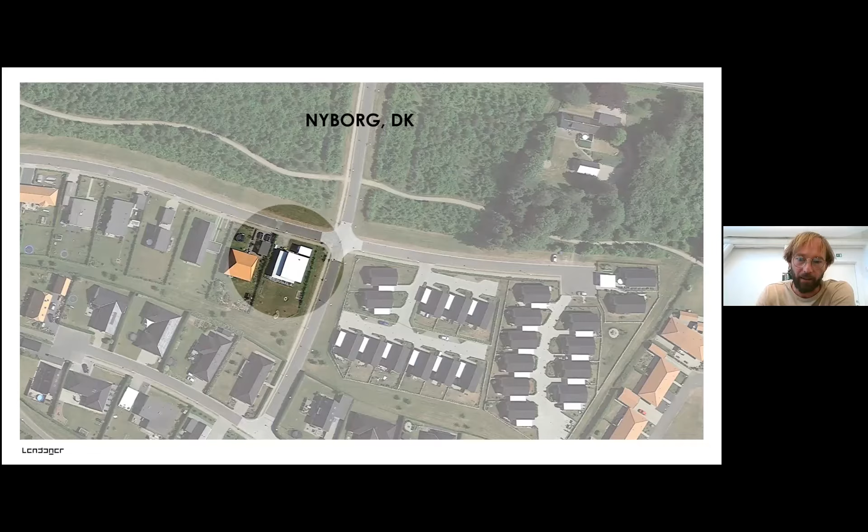The first project that I did was Upcycle House. It's a very small project, done in a very boring context in Nyborg, one of the most boring small cities in Denmark—I can say this now that I'm not in Denmark. But the interesting part was, could you build a very sustainable single-family house using only upcycled materials? At this point in 2011, the question was, what is upcycling in general?

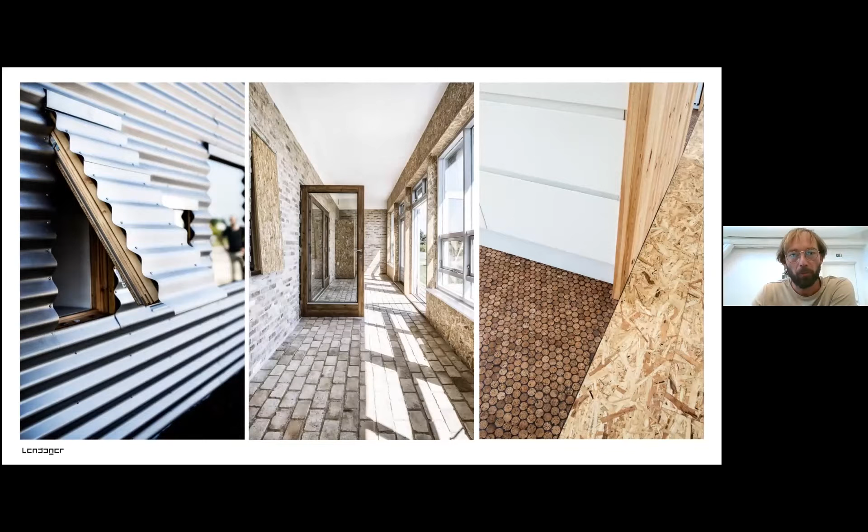Could you take materials like beer cans, soda cans, newspapers, textile, and upcycle them, find products where you could build a single-family house, and what would that mean? One question that started it all is something you've seen in many projects, which is the container. But what does that represent?

It represents an object from a different industry that becomes obsolescent, a waste product that you take into the building sector, and instead of a new structure in concrete, steel, or wood, it represents space and value. But if you ask that of every single product in the building, how would that look? Where would insulation come from? What about the windows, the roof, the facades, the installations, all this?

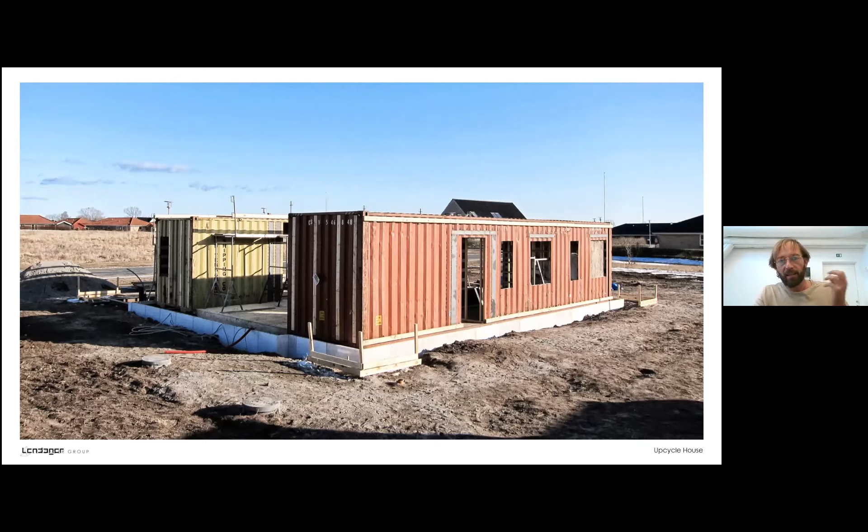That's what we did with this house that's made out of paper sheets. That's the black sheets, aluminum from beer and soda cans, and inside we use textiles, bottles from plastic that was shredded and upcycled, wood, insulation, and all these different items that created a quite unique single family house. The interesting part was that we saved 86% CO2 compared to a benchmark house, and it cost 1.7 million crowns, just around half a million euros.

So it was a very, very cheap house and a very, very sustainable house. And that led to the next question: what organism can actually scale this into a commercial building? Is that actually possible, and why isn't it possible? So I started looking at my own organization, which at that time was just an architecture company, and I could see that I needed to create some new types of businesses.

This is our management consultancy business that guides businesses to find their personal sustainability agenda. Our architecture business is designing, drawing, and making all the design documents to realize a building. But what we could see was that in the quest for sustainable buildings that evidently made a difference, we couldn't find the right materials that could be implemented commercially when we wanted to build with upcycled materials. So I created a new company called Upcycle Products that delivers these materials to our own projects and now also to other contractors and architects.

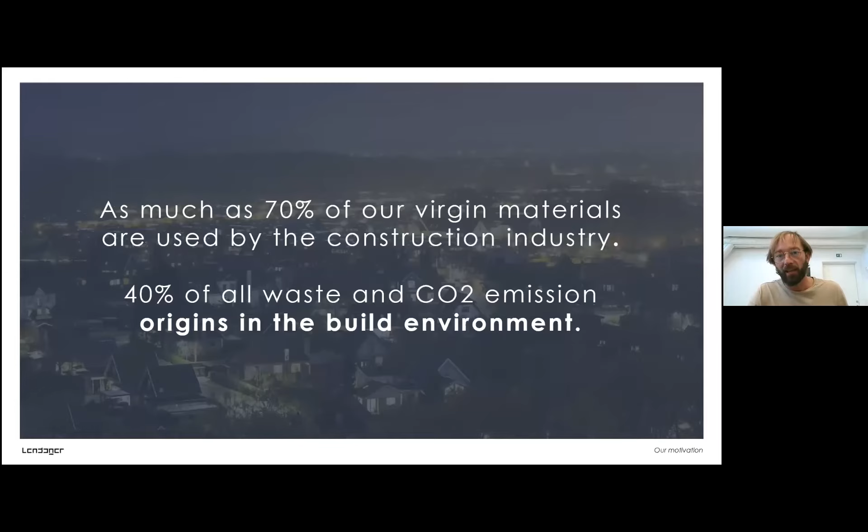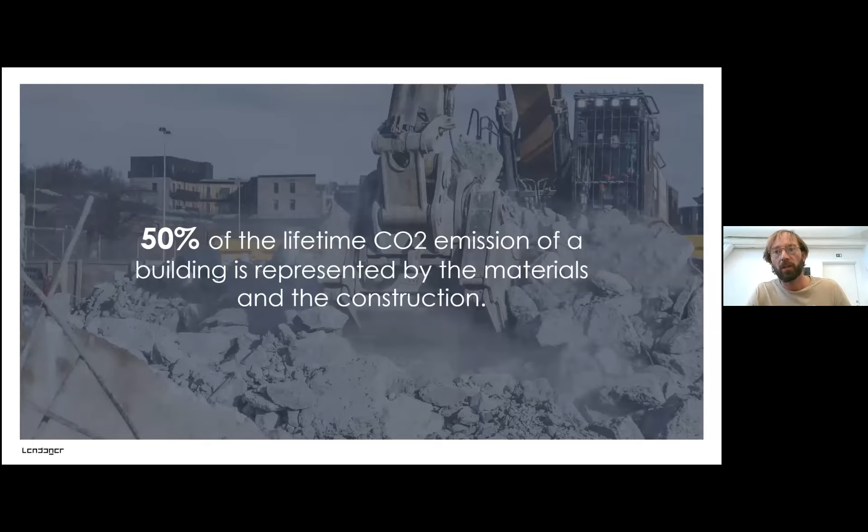So what we can see is that we also have a CO2 emission that represents materials, and 50% of the total CO2 emissions comes from the constructions. It's the surfaces, it's the matter that we're dealing with, and it's immense.

Often when talking about resources, this is just to show that it's a vast potential. In Denmark, we have 12 million tons of waste. We are one of the biggest waste producers in the world, unfortunately. But if you look into the construction sector, we are using 10 million tons of materials. Just putting these two in front of each other as a potential, we have enough waste annually to create the coming buildings. We just need to organize and urban harvest these potentials.

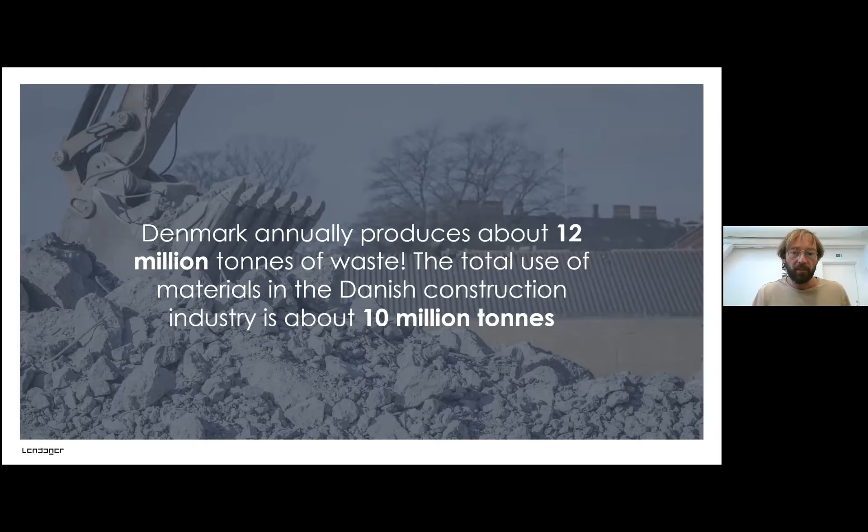An important thing when we talk about sustainability is also that it's about consumption. Where we are today, every time we create a sustainable solution, we create something that pushes an unsustainable product out of the market. So in that case, growth is our tool to scalability of sustainability, which is a very important agenda for us. That has been a very different agenda from the 'less is more' ecological approach to sustainability. We do believe that the drivers of scalability and business are what we need for this to scale up and accelerate, and that is important for now and the next coming decades.

Cascading is one of the most important things for understanding how a used resource can be added more value, going up or down. And prior, you always talk about cascading with wood - you have a big wood chunk and then you cut it up more and more. But we found out that this approach with cascading goes for all materials, glass, brick, plastic, and so on. It's your choices about how you handle these materials that can bring more value using less energy to produce an upcycled product.

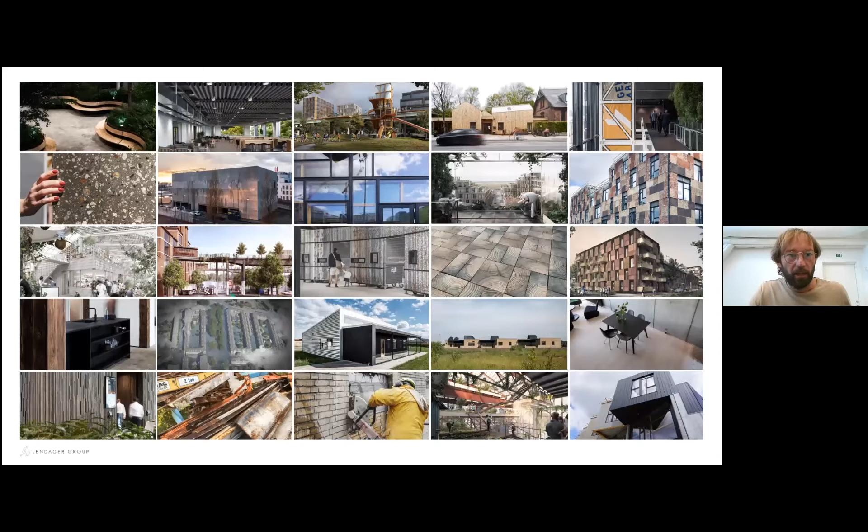So going into some of the linear projects, here's a vast image of some of the projects that we've done over time. The project I'm going to start with is Upcycle Studio. We believe it's one of the first commercial circular economy projects in the world, where we are leaning in and looking at some of the biggest waste problems in the world, upcycling them into products used on a commercial agenda, not costing more, but generating high sustainability and high value.

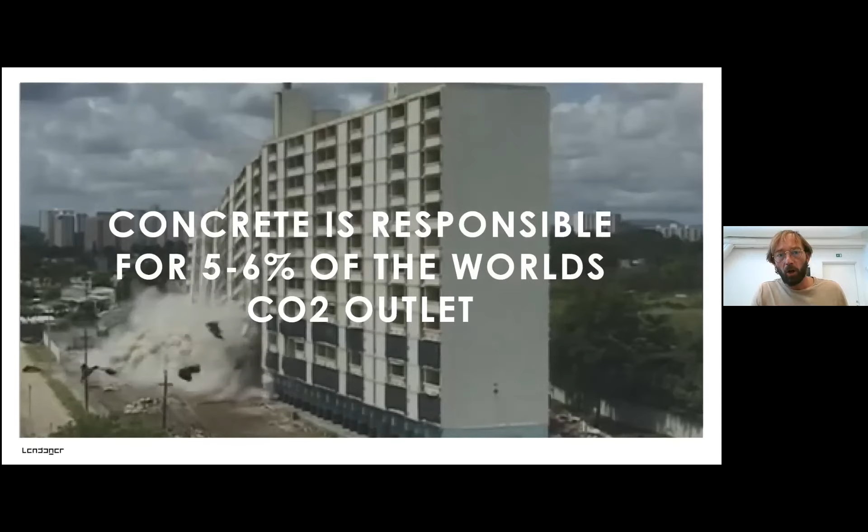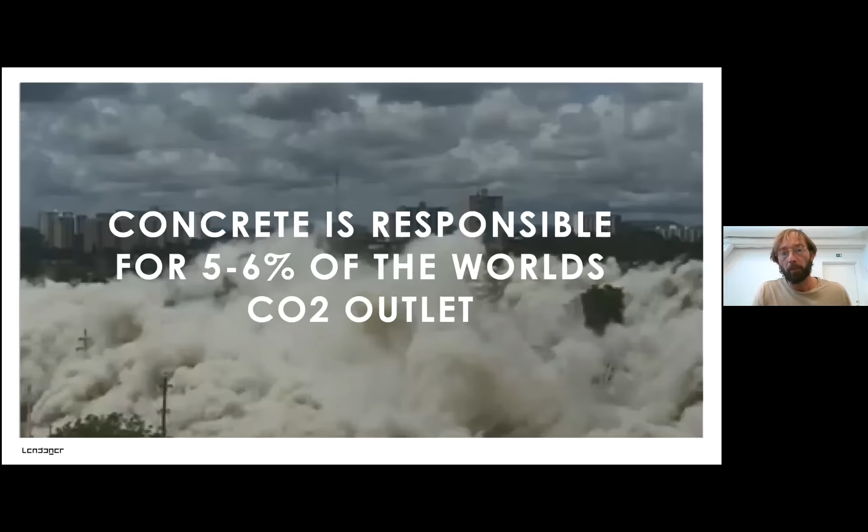Here are some of the places in Denmark where we harvested our waste resources to upcycle them. One of the main problems is concrete - this is how we often handle it. Unfortunately, we crush it and put it in the roads, which is a highly unsustainable approach, because it creates chemicals in our drinking water, which is a very big problem.

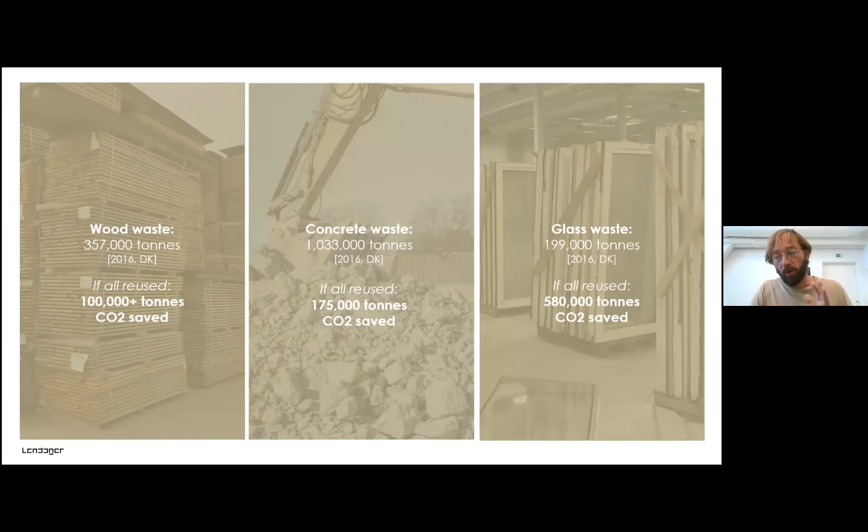So we need to create new circular solutions for that. What we've done here is find solutions for three items: wood, where we have a lot of waste - almost 400,000 tons in Denmark that we unfortunately just burn. We have 1 million tons of concrete and 200,000 tons of glass. So we decided, let's make a project where this becomes innovation, done with the economy of a normal project budget, which is around 10.2 million euros for this project.

So what you see here is a wood facade - off-cut materials from a wood manufacturer that's been upcycled into new products, both inside and on the outside of the facade. The windows are old windows that's been upcycled to new energy efficient glass and windows, and the concrete the same.

Here it's been important for us to solve a row house, almost 200 square meters, where you also have the possibility of having your own business inside, so you can rent a part of the apartment to yourself, and thereby have an economy where you both work and live and have a less stressful life.

But here you're seeing a high detail architecture that's all made out of waste, actually 1,000 tons of waste that's been upcycled for these row houses. Here from the roofscape, and here an example of the windows that we harvested.

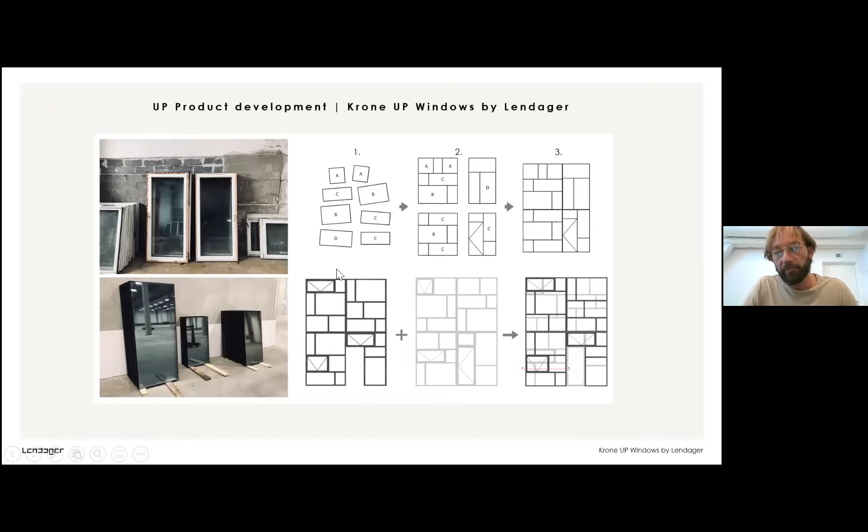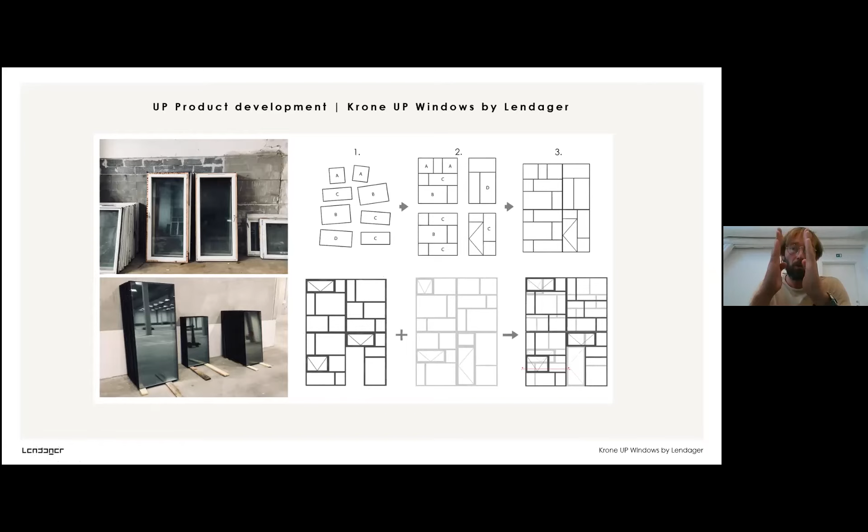We harvested 900 old windows, cleaned them up, and tested them for U and G values, making a whole new supply chain where we could create these 6 meters high, 4 meters wide windows consisting of 75% upcycled old thermal windows, put in front of each other to have a two-layered facade material with two thermal windows. Inside the building we have no chemistry, no fillers, no paint - which creates an indoor environment that is way more healthy than most new buildings or apartments being built today, which is key for healthy living as well.

And here the natural surfaces, the finished surfaces, is creating an architecture that we really like, and our clients love the natural environment of the materials that all has a story.

Here the concrete is harvested from the metro construction site where they have a lot of waste concrete that we've upcycled, crushed, and cast in situ on site, saving CO2, saving resources, and also creating a whole new infrastructure of concrete. Here you can see the beautiful flooring, which is wood that would otherwise have been burned because it was in odd sizes and odd lengths.

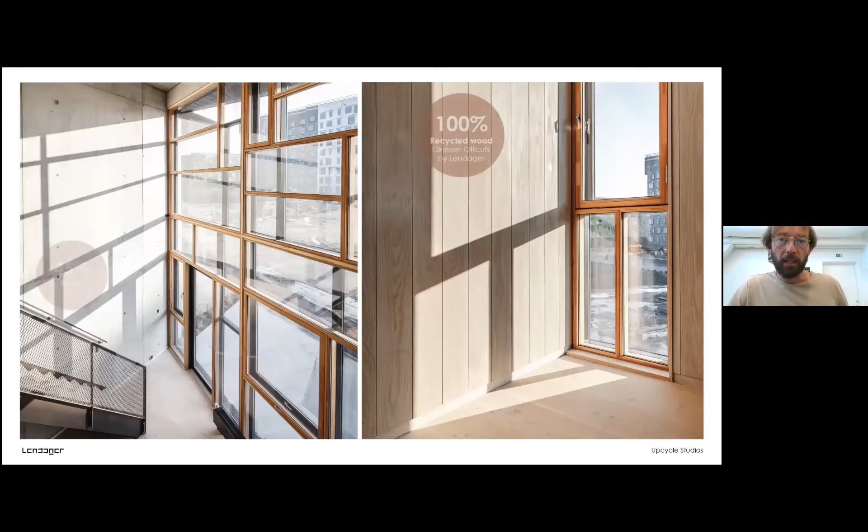And here are the windows that are creating a whole facade, but also generating daylight potential, a whole different way of accumulating this space, which is a 6 meters high space with potential for both business and living, so high flexibility. And also the interior where we have no aluminum studs, no gypsum - we only have natural materials in the indoor environment.

The important thing to say about this project is that it's among the fastest rented out houses in Copenhagen in the past 2 years. It's so important when you do sustainable housing that you have a client or user that understands your message on sustainability and wants to embrace it. That's why we're getting more projects like this—there are many Copenhageners and people in Scandinavian countries willing to move into these because the prices are the same as a normal apartment. What we created was an immense CO2 reduction, 45% for the whole project.

That's a vast CO2 reduction when we're actually building in concrete, which is not a very positive material CO2-wise. We also created 20 new local jobs.

Sustainable architecture is a political tool. It's not just space, not just buildings. This is a way of engaging with the social community, creating a political landscape where we're dealing with economy, innovations, local jobs, and CO2.

The Resource Rows is a project we did almost at the same time, with some of the same challenges but harvested in a totally different way. We have 11 million empty buildings across Europe—why don't we harvest them? Why not simply cut them down, move them, and build with these materials? That was the question behind this project, called the Resource Rows, where we wanted row houses, apartments, and allotment gardens on the roof.

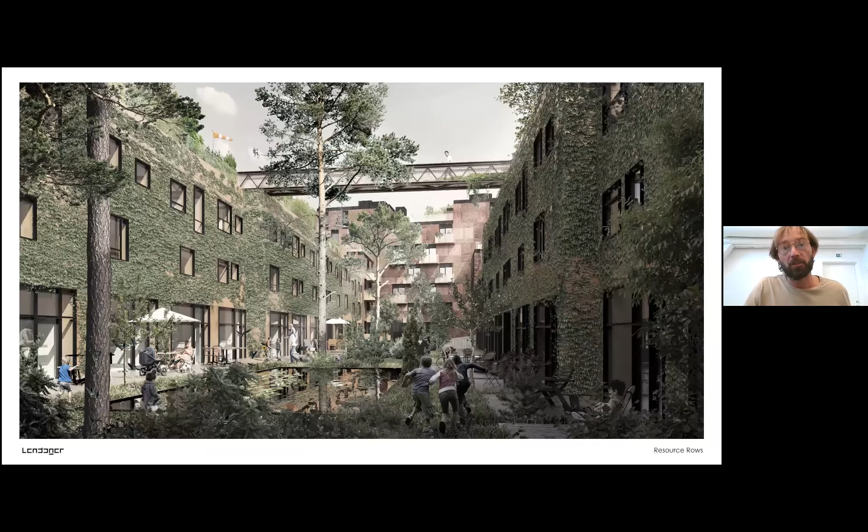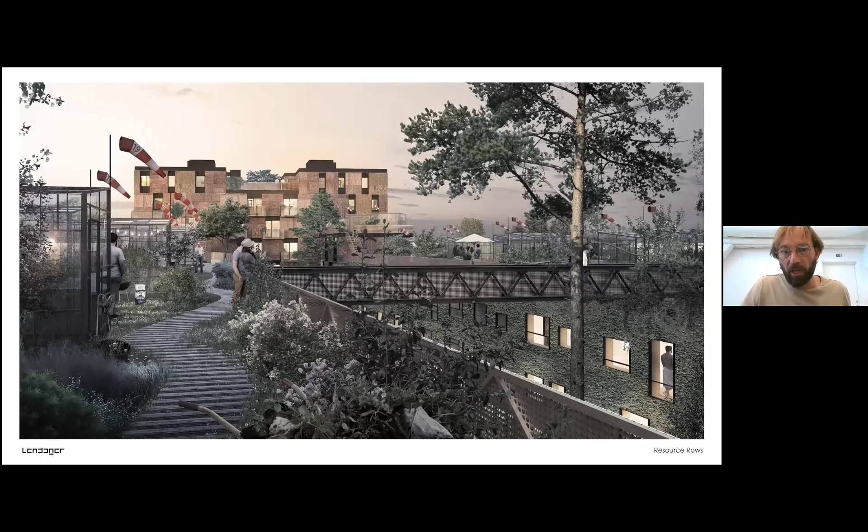Here's the section, and here's the visualization from the roof. A bridge connects these allotment gardens where people could meet, hang out, grow greens, have a beer, have a good time, and meet each other instead of living a segregated life in an urban context, as we often see.

One of the challenges was: what if we could take these brick buildings from the 60s? One problem is that the mortar is stronger than the brick, and when that's the case, you can't separate them. So we came up with the idea—instead of Lego, to use a Danish reference—of building big brio blocks.

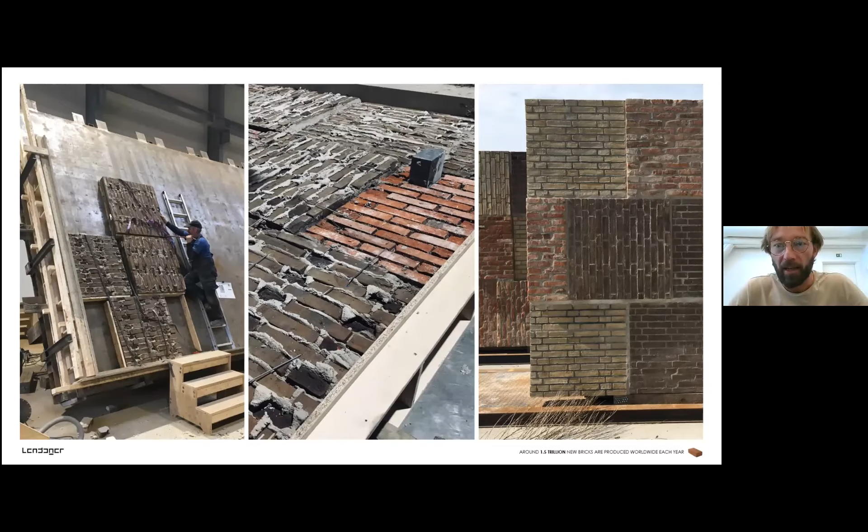These big building blocks would weigh 300 kilos but could create 1 square meter at a time. We set that into a system.

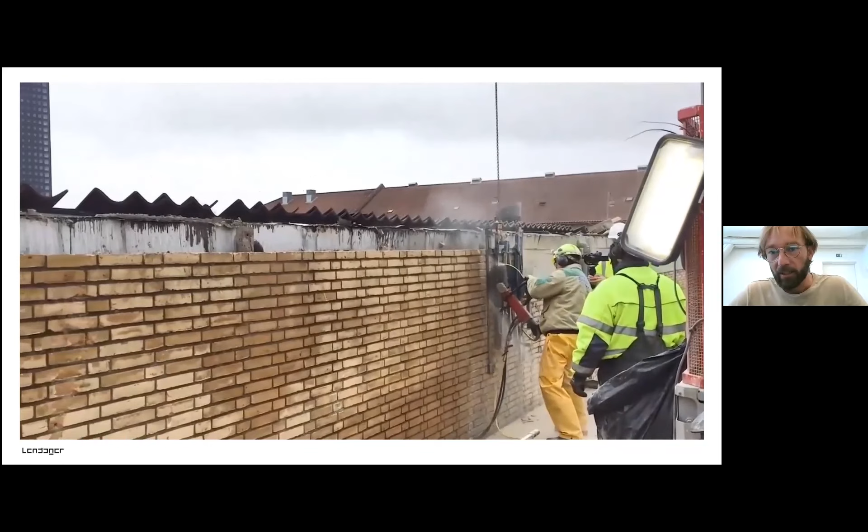It looked like this the first time we started cutting it down. Because no one believed in this, I needed to create my own brick company, which I still own today. I also own a wood company and a concrete company, because businesses in Denmark didn't really believe in these new innovations, so we had to start them ourselves in different partnerships.

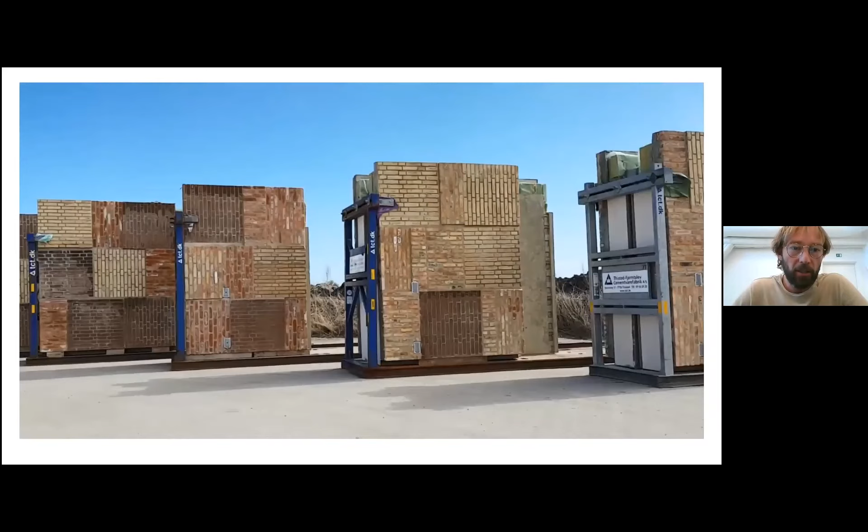Here we are, finished with the production, and I was very relieved at this time that we succeeded.

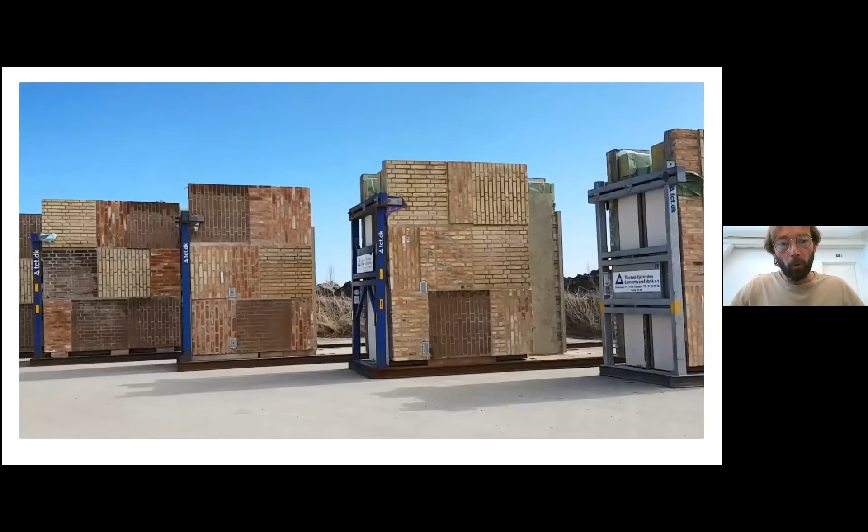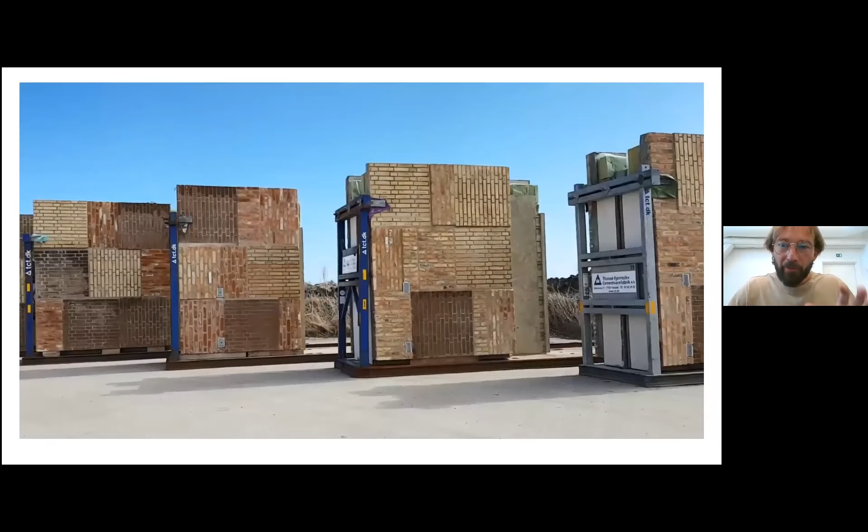The brown bricks are from an old brewery, Carlsberg Brewery. The red ones from a school, the yellow from a larger industrial area in Aalborg. So we harvested around Denmark, creating new facade elements and saving a tremendous amount of CO2, both on the bricks and the mortar, which accounts for a third of the CO2 impact on a brick building.

It's been tested by engineers, of course, but it wasn't in the budget to have a bridge. Upcycling a material made it possible for this kind of 3-dimensional courtyard space, creating social interaction between the tenants and residents in a really nice way.

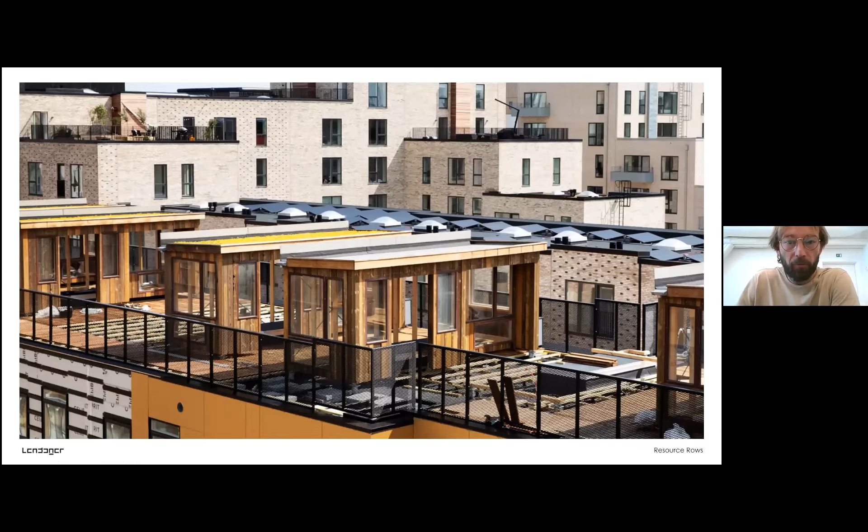Here's some other images: under construction, the allotment gardens on the roof, and some detailing of the facades. This project saved a lot of CO2, converted 500 tons of waste, and created new jobs. It's a cost-neutral project that is successfully rented out as apartments and row houses today.

The next stage of sustainability is maybe looking at an even larger perspective of not only resources. We did that on UN 17 Village, a beautiful site in Ørestad, a development area over the past 25 years. This is the last building plot, with nature around it. We wanted to make a regenerative building that gave more back than it consumes, in terms of waste, energy, water, but also social sustainability. What better to look at than the UN Sustainable Development Goals, all 17 of them?

But what is actually behind them? We found out there were 232 indicators of how to deal with these topics. So we spent 2 months creating this design tool where each bar represents concrete solutions we could design into the projects, set a price on, set an impact on, and then design from there.

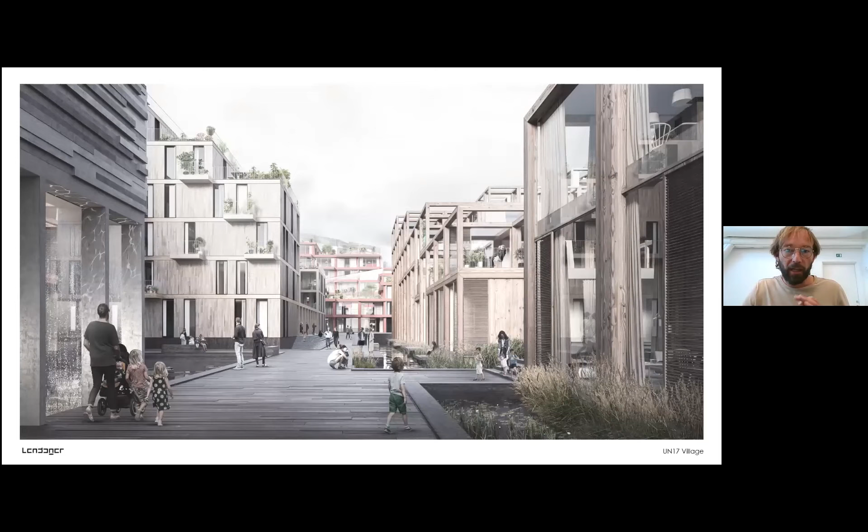The project looks like this. It's a lot of wood buildings. 4 out of 5 of these clusters are massive wood, and the facades are made out of different types of upcycled materials. We're handling wastewater to create water you can actually swim in.

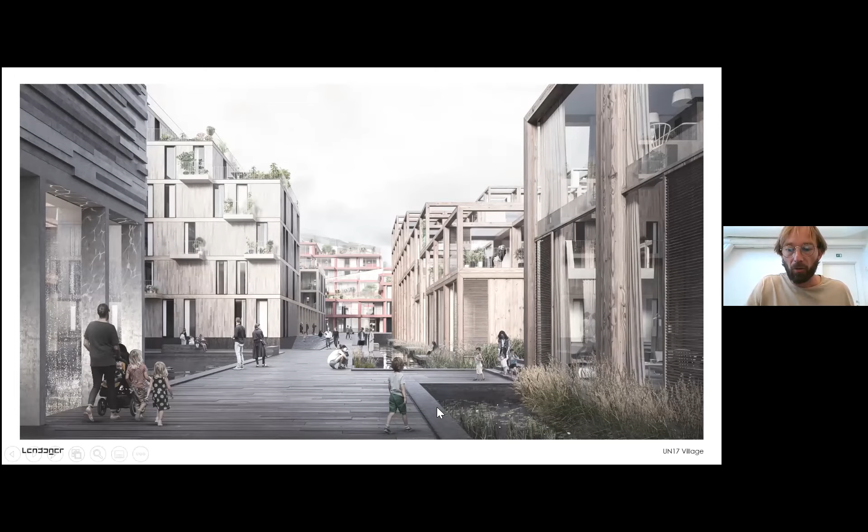I'm not allowed to show that, but you have to imagine old windmills used as shadow louvers on the facade as an upcycled product, taking a problem from the windmill sector and converting it into a building product that we're using on the facade of this project.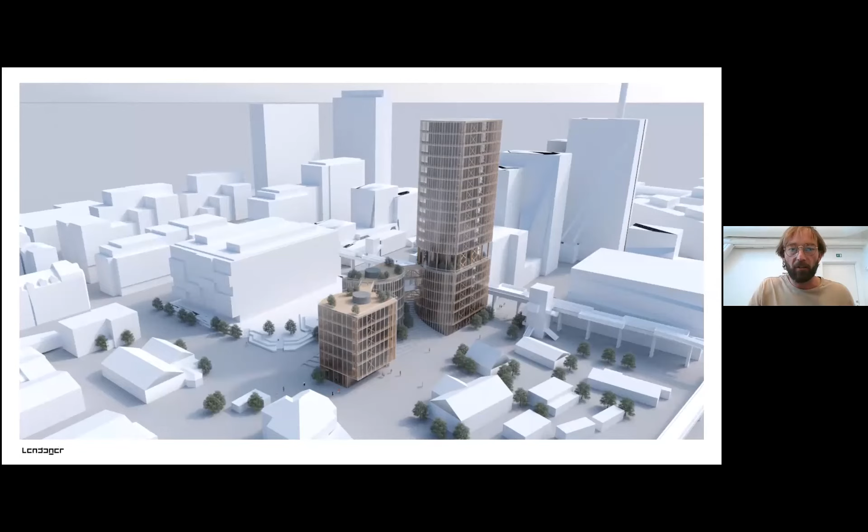One of the last projects I'm going to show you is the Olympic Pavilion that we were supposed to build this summer, but unfortunately, because of Corona and the situation, it's postponed to next year, where we hope it will be built. The idea with the Olympic Pavilion was to design an object that the Japanese people would know us from. The Danes always think that everyone knows what a Dane is.

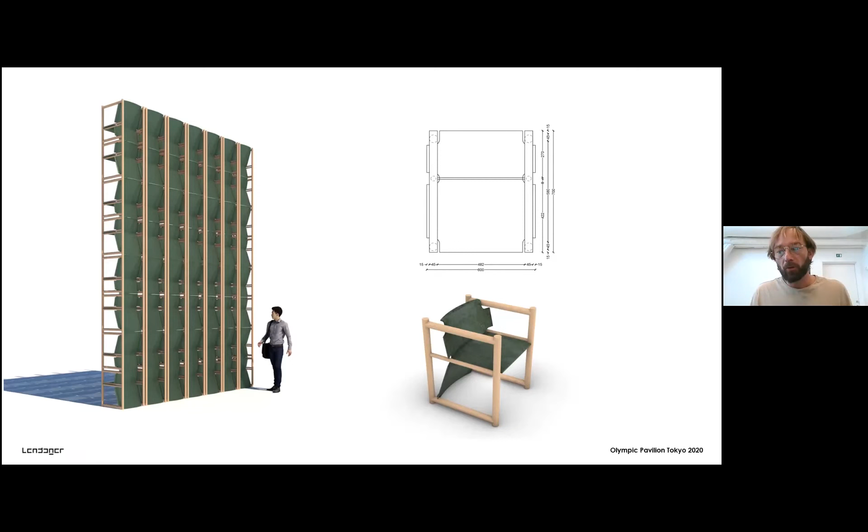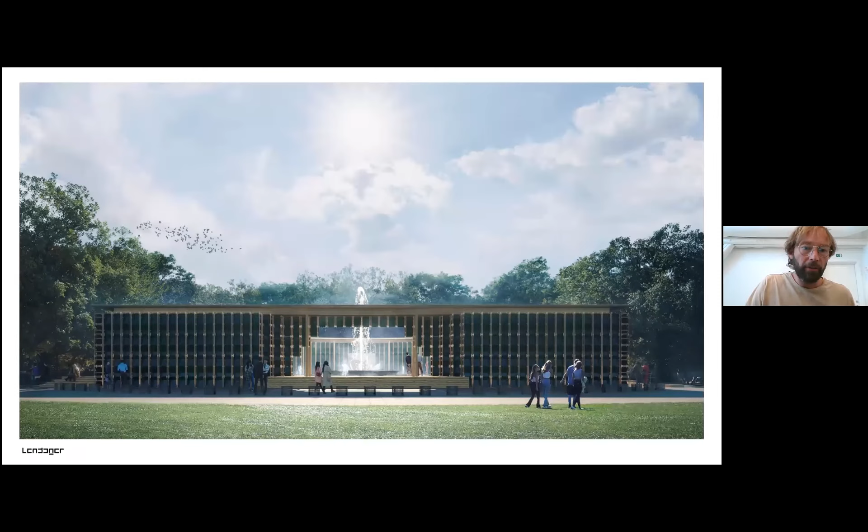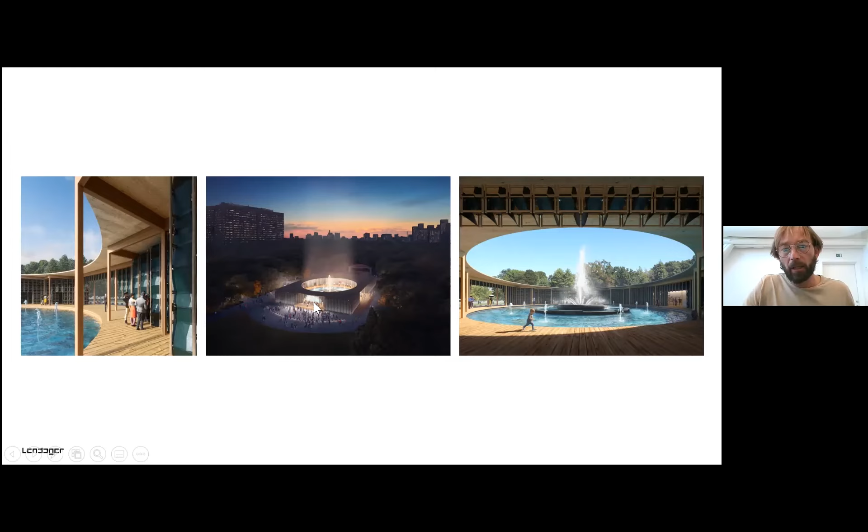The pavilion is going to look like this. It consists of 2,500 chairs stacked on top of each other. They create a facade on one side and a shelving system on the other side. It's built with support of wood from Fukushima, a challenged city because of the atomic accident, but also creating a framework for the Olympics in this period of time.

Afterwards, it's being sold as chairs in Asia, and right now Tokyo University is buying a lot of them.

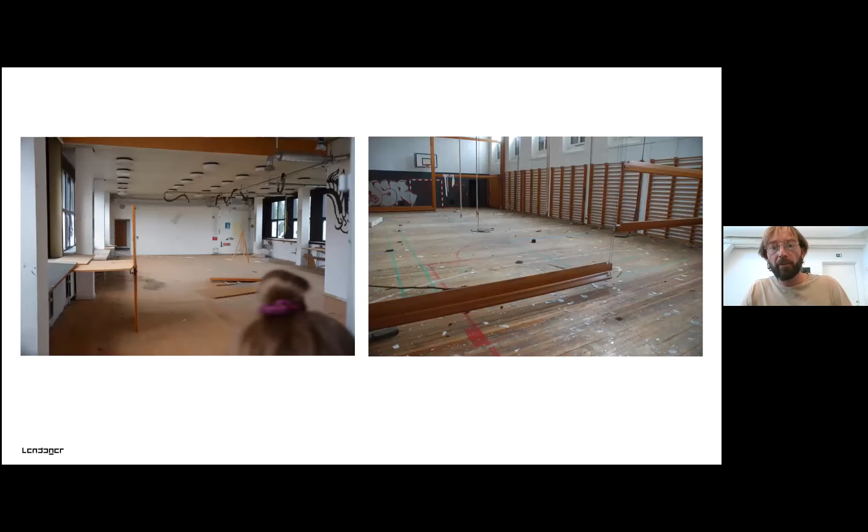And to a totally different project, just to show that the municipality is a very important part of also changing to circular economy. Circular economy is buildings like this, old schools that could be taken down and recycled. What we're doing for this municipality is to upcycle these materials on site, using the soccer field to harvest, segregate, and prepare them to build the new building.

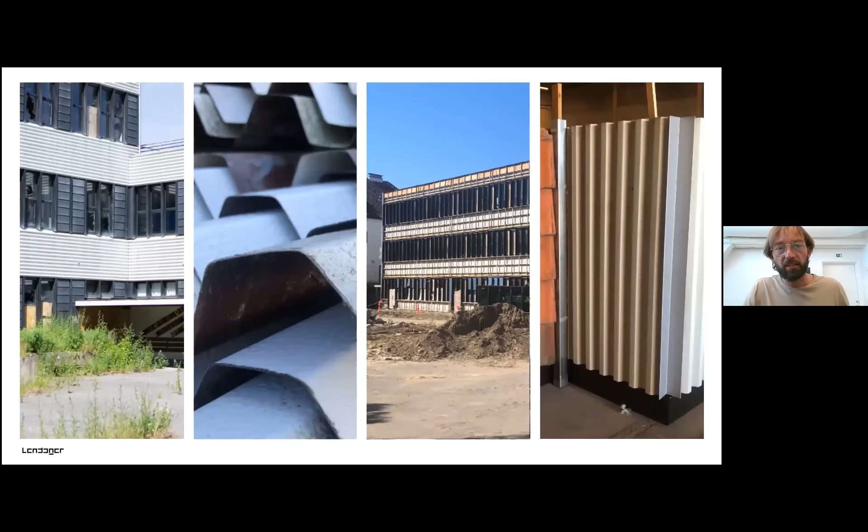So in the future, these 70s buildings and steel facades will be upcycled into this kindergarten, built on the same site. The materials don't have to leave the site; we're creating tenders for the municipality and a design where it can actually be upcycled on site, and the contractor can take over these materials and start building with them, where we're helping this become a reality.

And then I have a film to end this talk. I hope there's time for it. If you can't hear it, let me know. That's been a problem before, so I will try to set it off here.

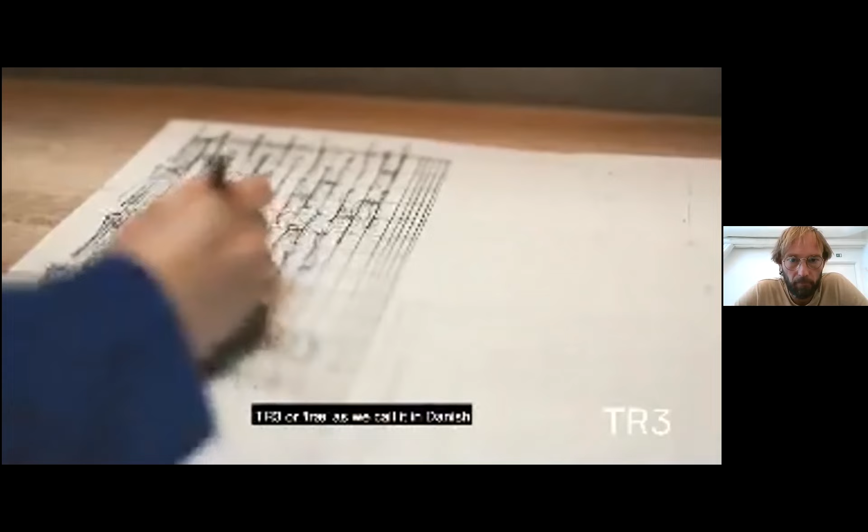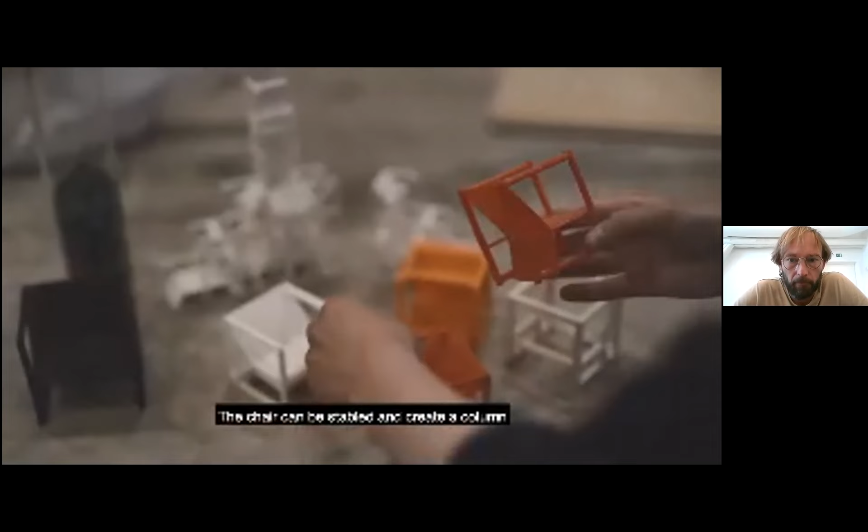The Olympic Pavilion is made out of ocean waste and industrial waste plastic that's converted into a design of a chair, actually creating a column, a beam, a wall and a shelving system. So these 2,500 chairs all together create the pavilion for 9 weeks. And after 9 weeks, it's disassembled and becomes a design object sold in Asia, with a use for many years to follow.

You can actually take some of these large problems that we have in the world and convert them into solutions.

Anders, thank you so much for sharing your really kind of radically inventive approach to reducing the astounding levels of carbon and waste in the construction industry. And what's really good to see is there's definitely no compromise in the quality. And I think everyone who I'm reading comments on the chat seems to agree you've really created a compellingly beautiful architectural language from upcycling products and materials.

So I'm just trying to keep track of the stream of questions coming through on the chat. And I suppose there seems to be quite a few questions around the barriers, maybe around the provenance of materials. So, you know, what kind of barriers are there to getting, for example, material passports? And another sort of factor that's come up is whether there's a sense that material suppliers maybe are disincentivized from upcycling materials for commercial reasons. Do you have any kind of comment on either of those two points?